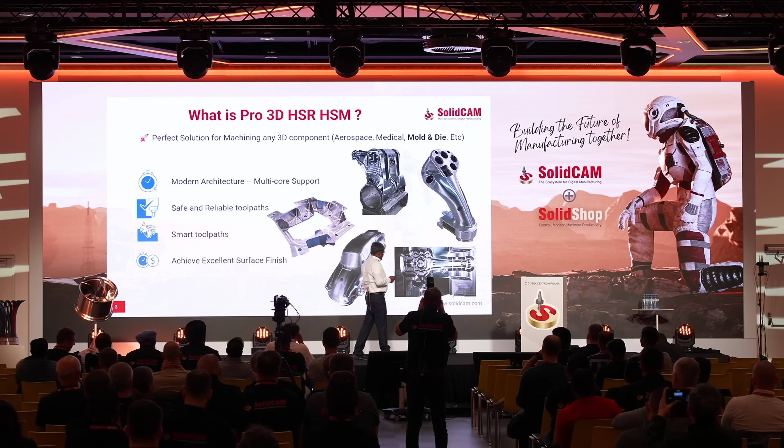And all the strategies in this technology generate collision-free toolpaths against machining surfaces and in-process workpiece to make sure it generates safe and reliable toolpaths. And we have smart links and optimized retracts. And then we have optimized point distribution and advanced arc fit to achieve excellent surface finish.

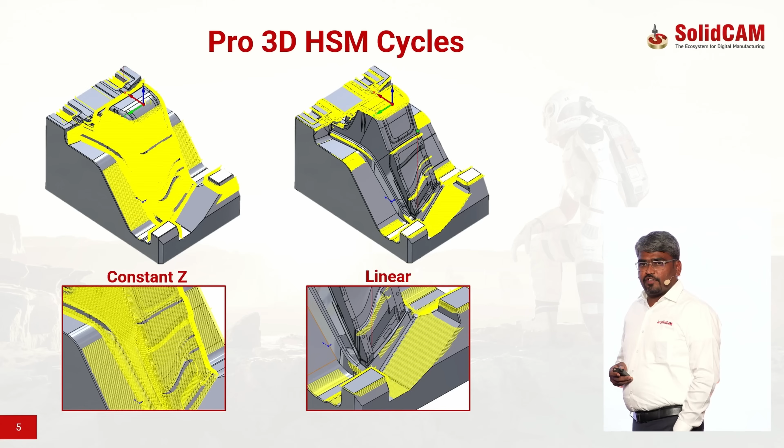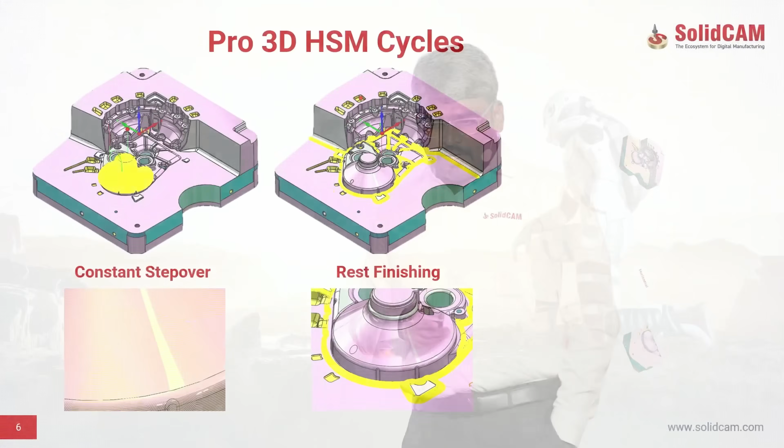Pro3D HSR offers several machining strategies: hatch, contour, and rest roughing. And then finishing offers various cycles. Constant Z for finishing steep areas, linear for finishing shallow areas, and combined for machining steep and shallow areas together. And then we have the excellent constant step over. You could use this cycle for machining steep and shallow areas. And then rest finishing to process the corners which were not finished by the previous finishing operations. And finally, we have horizontal milling, which is a dedicated operation to machine flat or planar surfaces.

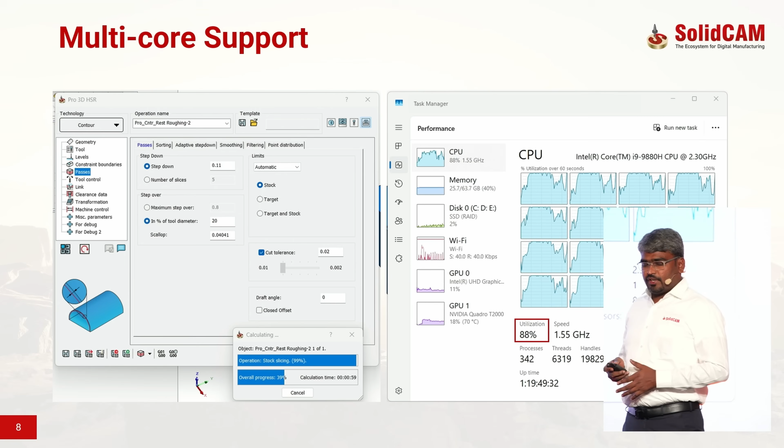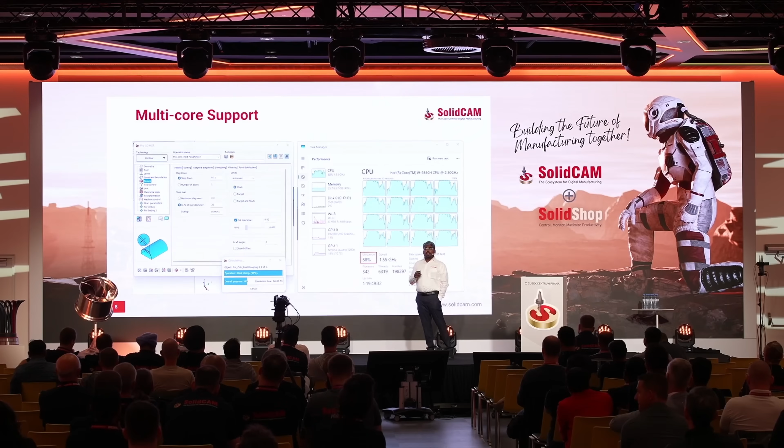Let's see some highlights. I always say these are the game-changing functionalities in 3-axis technology. This technology uses multi-core. It utilizes the full computing power of the latest workstations with up to 24 cores for ultra-fast toolpath calculations. And the recalculations are also faster thanks to its caching mechanism. Each stage of the toolpath calculation is cached and stored on the disk, so that subsequent toolpath modifications are calculated faster. For example, if you change the links, the links algorithm recalculates the toolpaths, and the calculation becomes much faster.

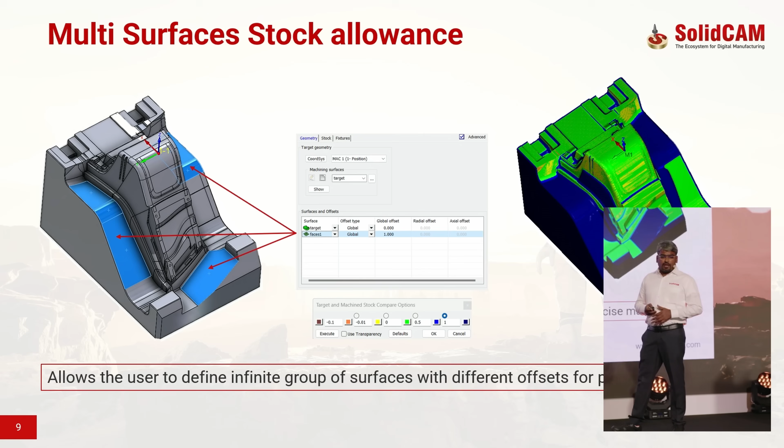Multi-surface stock allowances: you can define various surface groups with different stock allowances. This functionality is very useful when you're machining mold and die components, especially since the parting surfaces and the component areas usually require different surface offsets for applying different manufacturing processes.

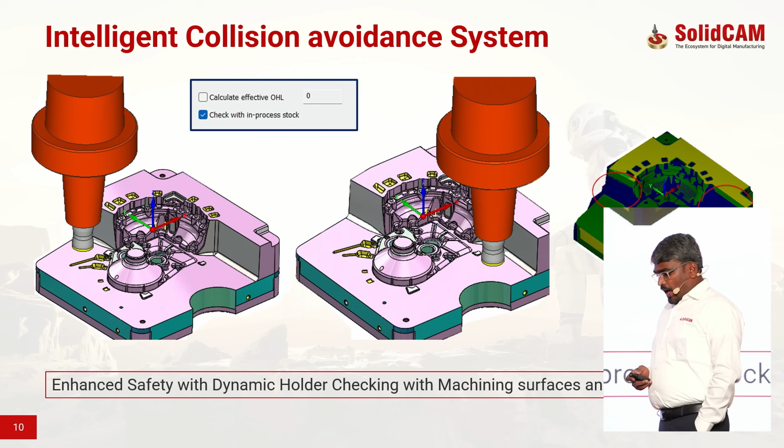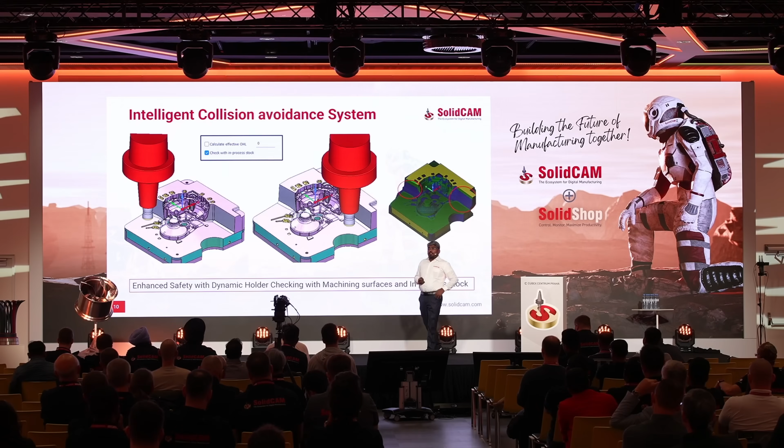And it is built in with an intelligent collision avoidance system. Until SolidCAM 2023, only the passes were generated collision-free against the in-process stock when you enable the check with in-process stock. From SolidCAM 2024, the whole toolpath, passes, leads, links, regardless of your link settings and lead settings, SolidCAM will automatically generate collision-free against in-process stock, because it knows the in-process stock at each Z level, and it can generate safe and reliable toolpaths.

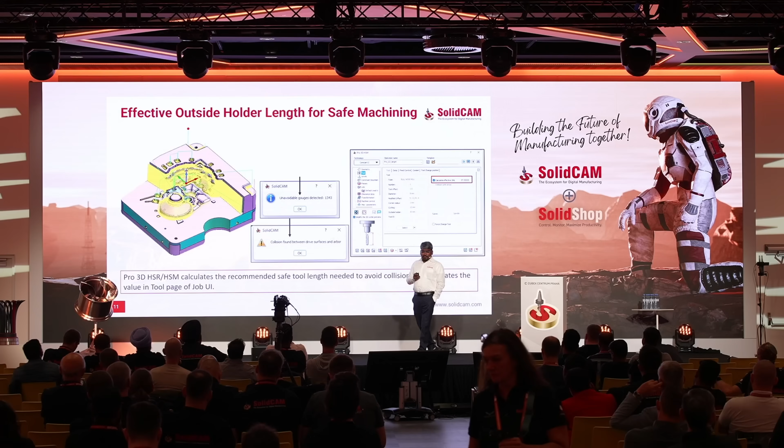And then it can suggest the effective outside holder length for machining the part. It helps us to use optimal tool length, neither too long nor too short. And the uniqueness of this feature is when the actual outside holder length is less than what SolidCAM suggested, it will show you the gouges detected by the software.

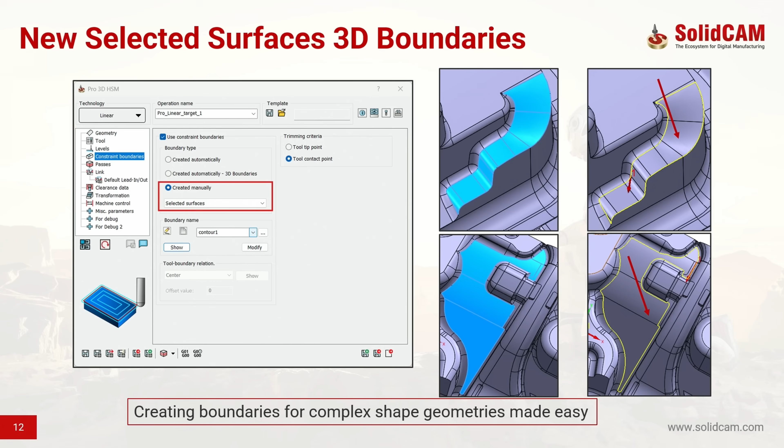And then we have new selected surfaces 3D boundaries. This is newly implemented inside Pro3D HSM. Since Pro3D HSM is a model-based toolpath generator, it needs precise boundaries for machining local surfaces. So thanks to our new selected surfaces boundaries, you can select any complex geometry. It could be convex, concave, or a combination of both. The new selected surface boundary will automatically generate a precise 3D boundary and send it for the toolpath calculation.

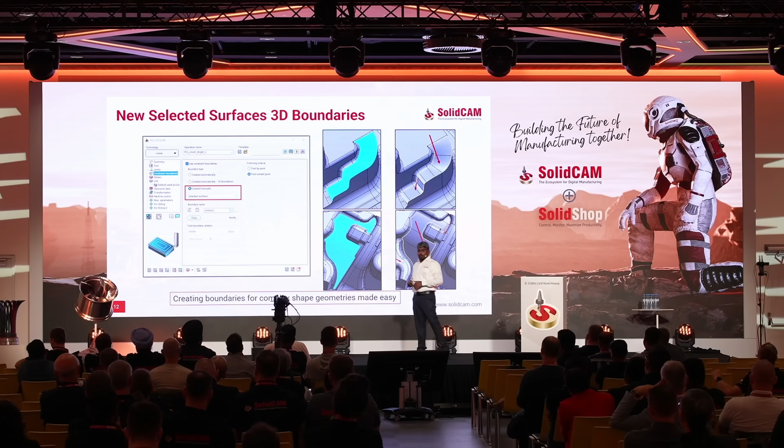Along with this, now we have 3D boundaries, and SolidCAM has to trim the passes precisely to that boundary. So in the tool page, you have trimming criteria. You can see on the left image, when the tool tip point is selected, you can see the spikes on the adjacent surfaces. Whereas on the right image, the tool contact point is enabled, and SolidCAM is able to precisely trim the toolpath exactly to the defined boundaries. This way, you can precisely machine the local surfaces.

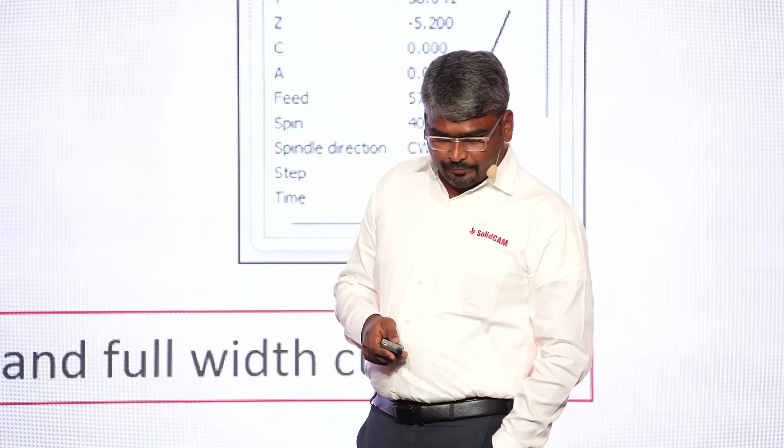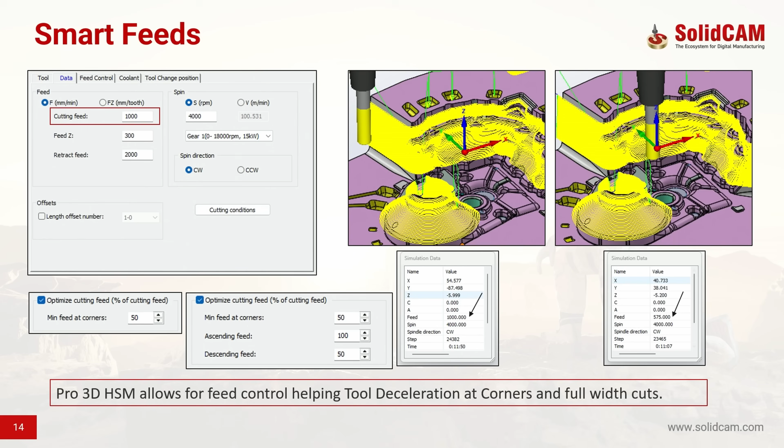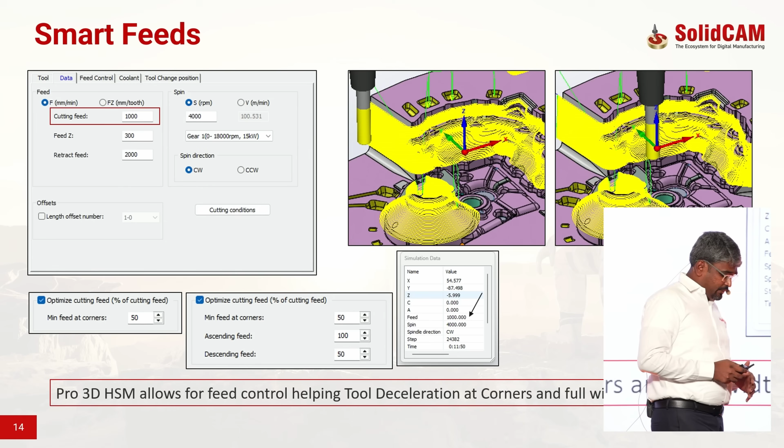Then we have smart feeds. I also call these intelligent feeds. Pro3D HSR HSM is designed to intelligently manage the feed rates while machining complex cores and cavities, especially on the corners. It smartly modulates the machine's velocity with gradual deceleration and smooth acceleration post-machining corner. And this sophisticated system significantly increases the feed rates in the less constrained areas, optimizing the whole machining time with less tool wear. This will help us to efficiently machine the part with accuracy in various cutting conditions.

And then it has a built-in efficient arc generator, and it is capable of creating arcs in any plane, and also capable of creating 3D arcs for spiral toolpaths. This will significantly improve the surface quality, and it also drastically reduces the NC file size.

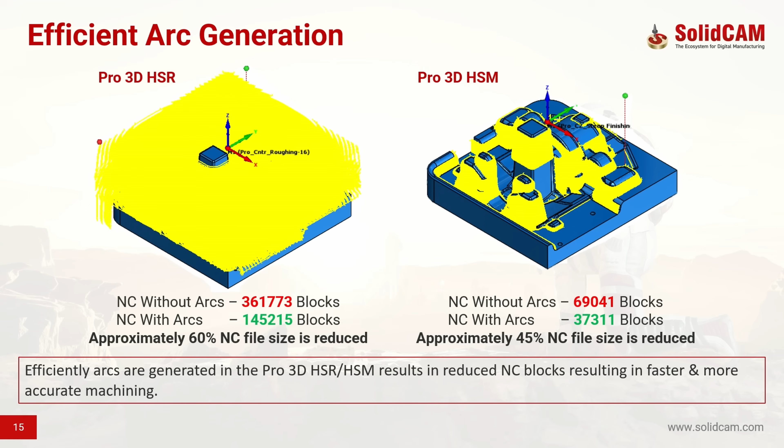You can see on the left image, the roughing toolpath without the arcs, the NC file contains 361,000 blocks, whereas with arcs, 145,000 blocks. Approximately 60% NC file size is reduced. Whereas in finishing, G-code without the arcs is approximately 69,000 blocks, whereas with arcs, it reduced to 37,000 blocks. Approximately 45% NC file size is reduced.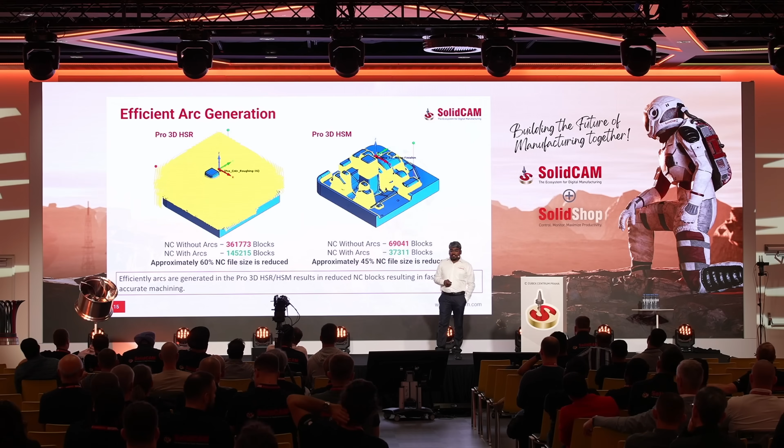And then we have high feed cutters. Usually, high feed cutters are defined as a bull mill with a programmable tool radius provided by the tool manufacturer. However, in this case, the toolpath that is created with the bull mill, and you see the resultant stock, and the stock that was generated after the real machining, they don't match.

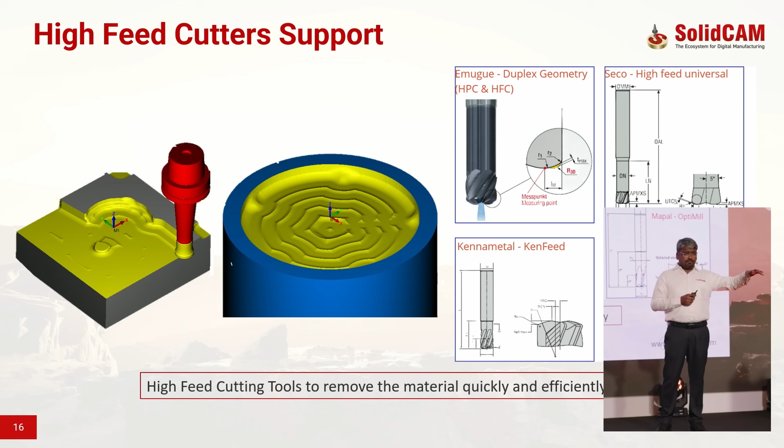So when you create a subsequent rest roughing operation, what happens? The CAM creates the toolpath which is based on the resultant stock provided by the bull mill. And when you run this toolpath on the machine, you have a problem. You will sometimes find more load on the tool because the stock is more on the real part. So how do we fix this issue?

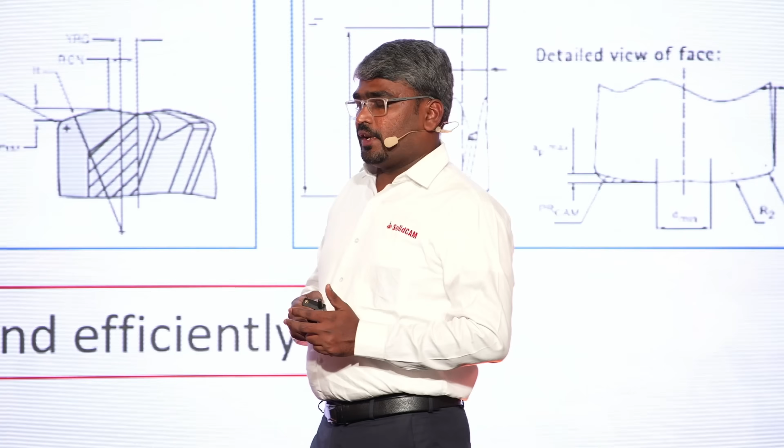From SolidCAM 2024, this system actually takes the exact shape of your high-feed cutters. It could be round inserts, it could be square shoulder inserts, it could be triangle inserts, convex tip, any shape. It can adapt the exact shape for mathematical toolpath calculation. Hence, it can generate safe and reliable toolpaths.

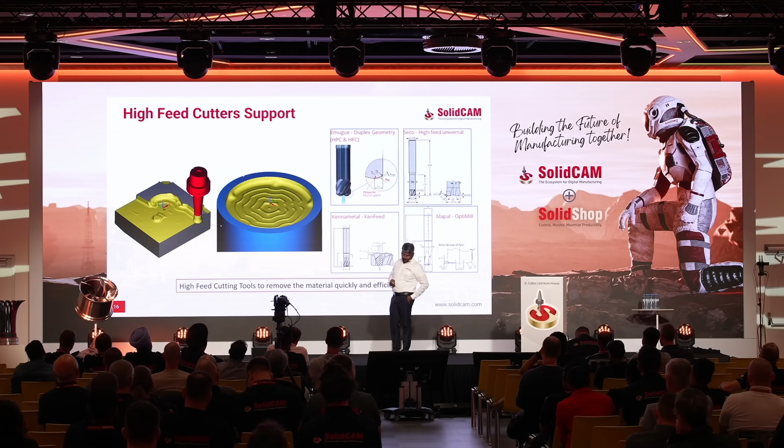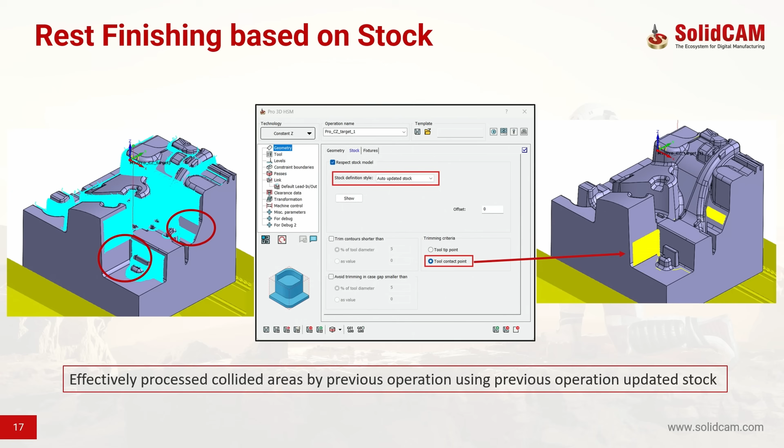And rest finishing based on the stock. You can effectively process the rest areas which were not processed by the previous operation. And like we had the trim to boundaries in the constraint boundaries, when you're working with the previous operation stock, you can also tell the system to exactly trim the passes to the provided stock. And this way, you can efficiently process the rest areas.

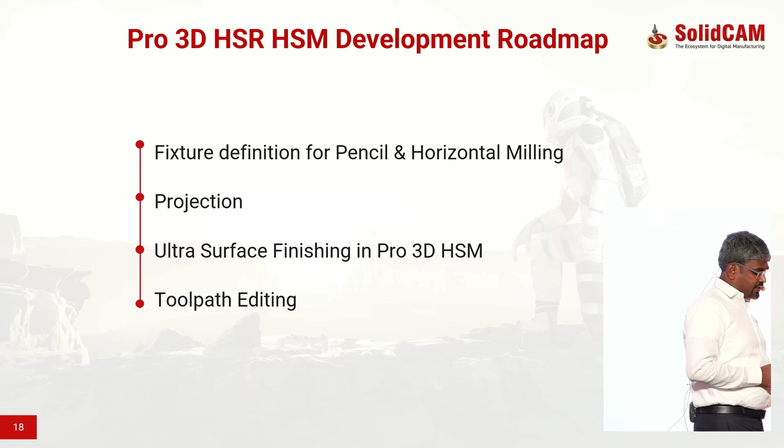And then ultra-surface finishing in Pro3D HSM. Until now, the toolpaths are being calculated on the STL mesh. So we are working on a different approach where SolidCAM can actually take the NURBS surface data and use it for the toolpath calculation in order to achieve ultra-surface finishing. So initially, this will be available for the linear machining, and then it will be extended to the other cycles.

So toolpath editing, it's not a new subject for us. It's been there for a long time. Today, I want to assure you that this toolpath editing will be soon available in SolidCAM 2026. So apart from this, we have made some developments. Their prototype solutions are already there.

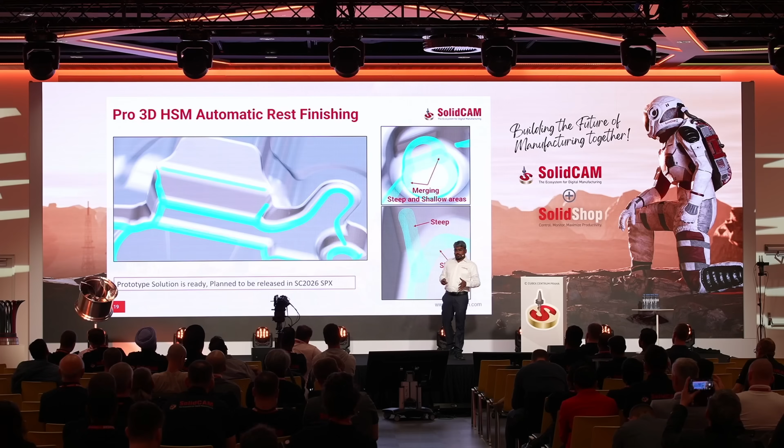In finishing, we have corner finishing, automatic rest finishing. So this is a new generation corner finishing. You can see on the right image, the stitch between the steep and shallow areas, it's very nice. And you can create the rest finishing toolpath using previous operation tool and also the stock. So this we are going to test very soon on the machine, and it is planned to be released in SolidCAM 2026.

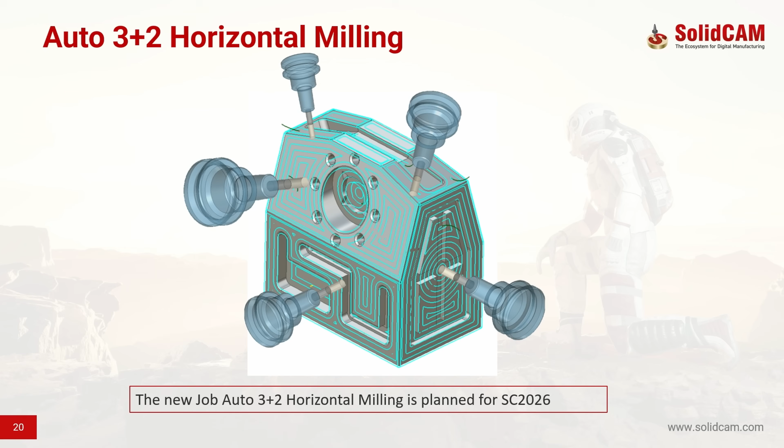And then we have the new job, Auto 3+2 horizontal milling. Let's imagine you have 10 flat surfaces from different directions, right? So with the current SolidCAM approach, you have to create 10 operations with the different coordinate systems, right? So how do we simplify this workflow?

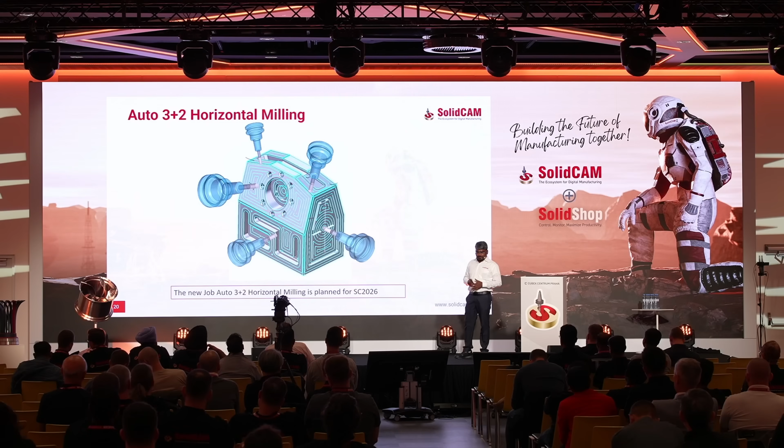With this new Auto 3+2 horizontal milling, SolidCAM automatically detects the flat surfaces from each direction and creates the toolpaths. And instead of 10 operations, you will end up creating only one operation for all the 10 surfaces. So the detection mode could be automatic, semi-automatic, and manual, the same like we had in the Auto 3+2 roughing.

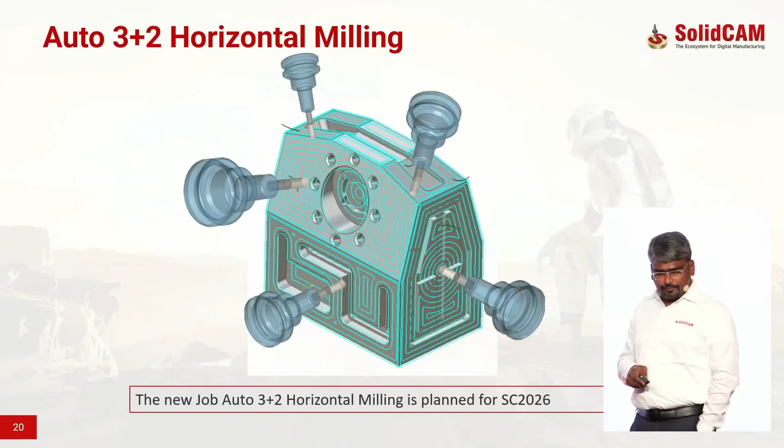And then we have rest finishing by outside holder length. Until now, we can do rest finishing based on the previous operation stock, based on the previous operation tool. Now, we are going to have the third rest finishing option, with which you can create a rest finishing operation using the outside holder length of the previous operation.

And this way, you can efficiently machine those areas we usually call the collided areas. So you can process these collided areas easily just by giving the information of what is your previous operation outside holder length.

And then we have exciting information over here. We have compared Pro3D HSR HSM against one of the leading CAM software for mold and die machining. And there are some things which are really impressive in the Pro3D HSR HSM. So as you all probably know, the calculation time, of course, we are much faster than any CAM software. In this case, we are 3 times faster. Sometimes it goes up to 5 times faster.

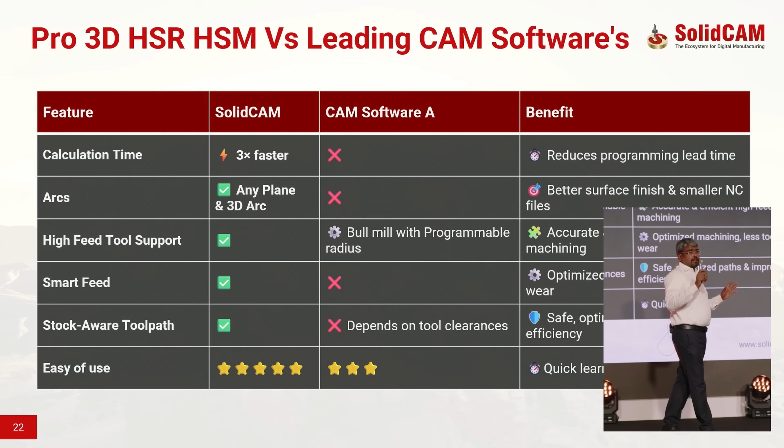And then SolidCAM is capable of creating the arcs in any plane and 3D arcs as well for spiral toolpaths, whereas the competitor still generates the points in the toolpath. And then we have high feed tool support. We don't define the bull mill with the corner radius. We define exact tool shape and use it for accurate and efficient high feed machining, whereas competitors still define these high feed cutters as a bull mill with a programmable radius.

And then we have smart feeds. They have constant feeds. And then Pro3D HSR HSM has stock-aware toolpath. And this is very important. At each stage of the toolpath, SolidCAM analyzes the in-process stock at each Z level in order to generate safe toolpaths. It could be passes, it could be links, it could be leads. Whereas in the competitor, they still depend on the tool clearances.

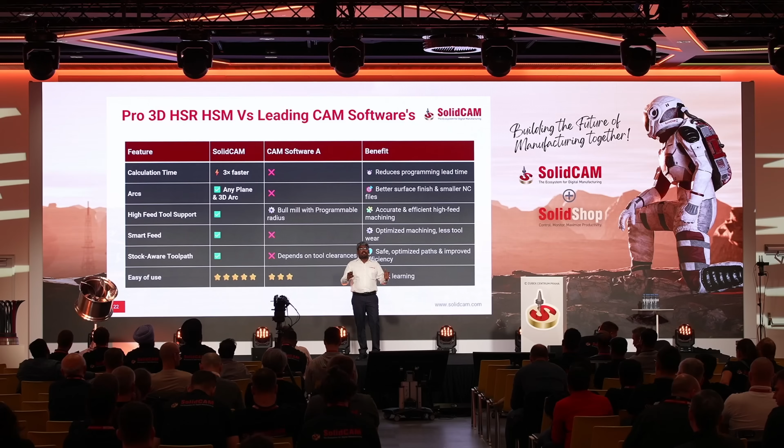So ease of use, of course, we have a nice structure, user interface, and it's easy to learn. And then most of the things are automatically created inside Pro3D HSR HSM. You don't have to manually think how to approach from the outside, where to ramp, where not to ramp. All these decisions are made automatically by this technology. That's where the Pro3D HSR HSM makes the programmer's job easier. And this rating was actually given by some of the programmers who have 15 years of experience in the competitor software, and they are currently using SolidCAM.

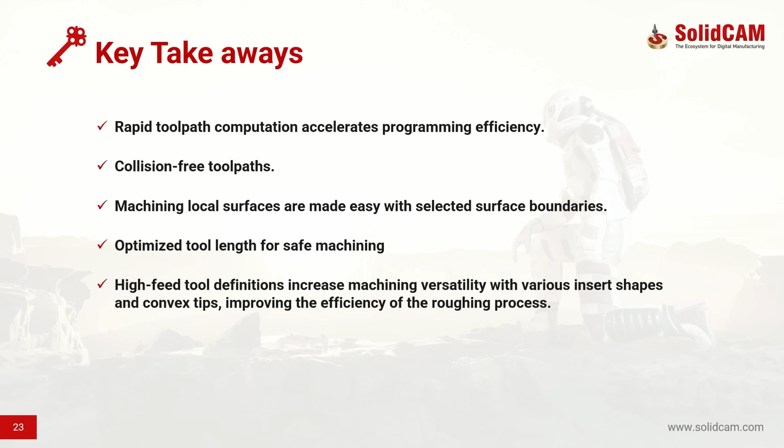So to summarize, we have faster toolpath calculations, we have safe toolpaths, and we have new selected surface boundaries to efficiently machine the local surfaces. And then we have optimized tool length for safe machining. And we have high feed tool definitions. So we have seen all the functionalities. Let's see it in action.

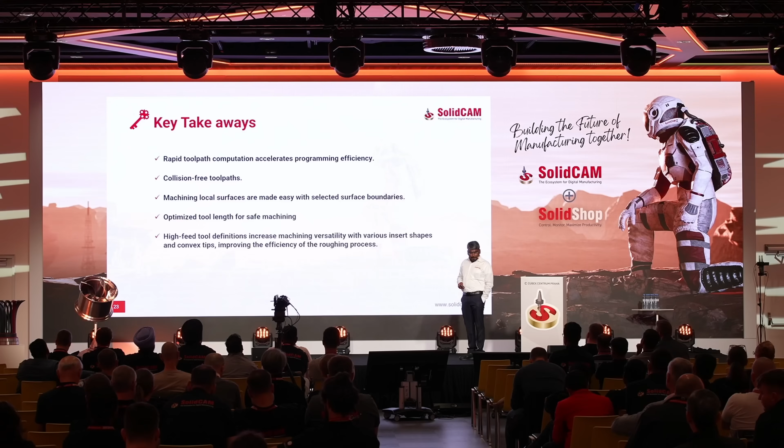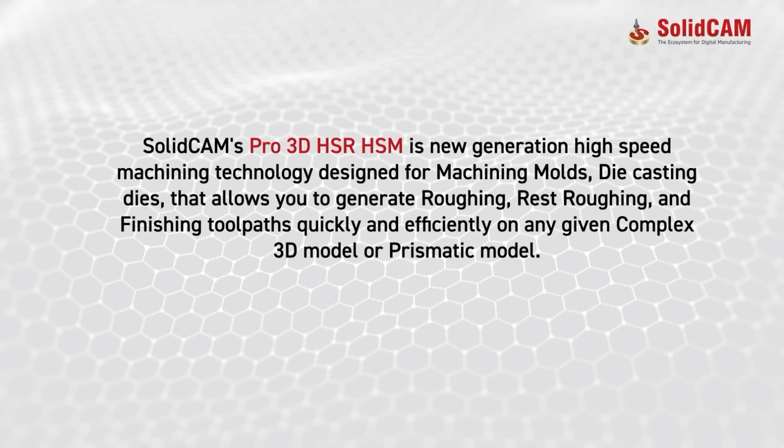SolidCAM's Pro3D HSR HSM is new generation high-speed machining technology designed for machining molds, die casting dies that allows you to generate roughing, rest roughing, and finishing toolpaths quickly and efficiently on any given complex 3D model or prismatic model.

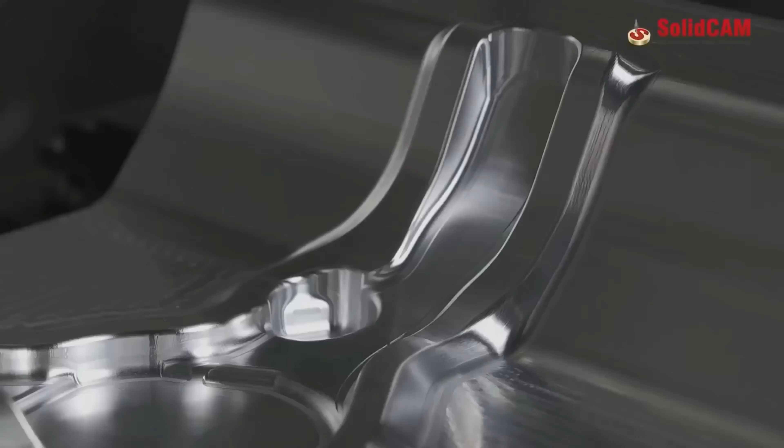So now let's see a sneak peek of Pro 5-axis milling. What is Pro 5-axis milling? This is Pro3D HSM combined with the Sim 5-axis milling tool-axis control. So this technology is designed to machine mold and die parts in 5-axis mode. So we have this part, a complicated die here. Just imagine finishing this component using 5-axis surface-based operations.

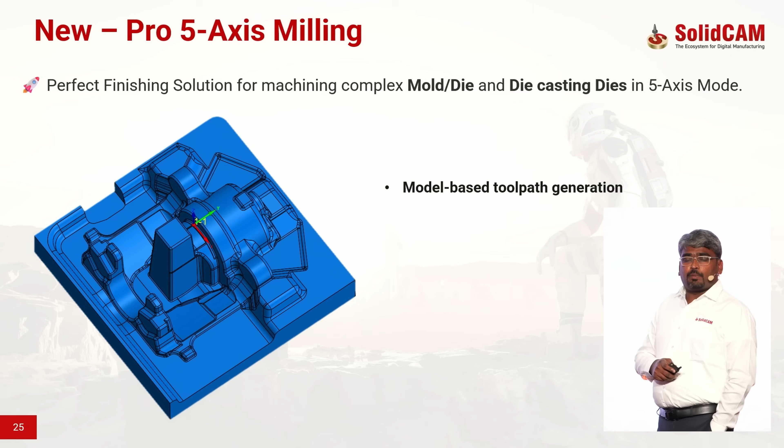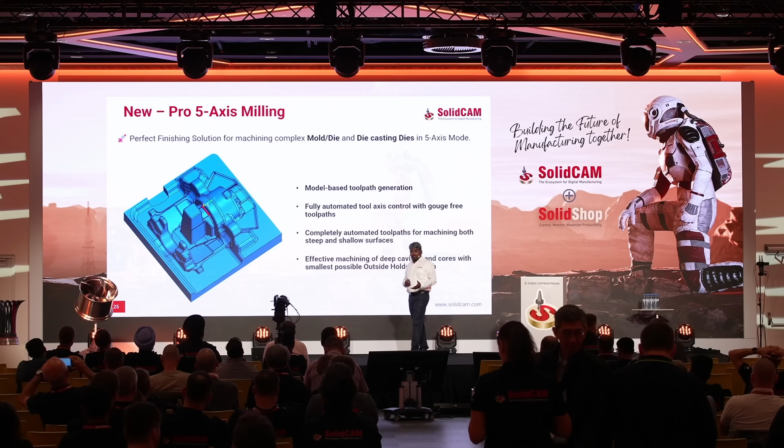It is a model-based toolpath generator. And then we have fully automated tool-axis control with gouge-free toolpaths. No gouge check. All the gouge checking is taken care of by SolidCAM. The toolpaths are completely automated for machining deep, steep and shallow areas, basically. And it can effectively machine the deep cavities and cores with the smallest possible outside holder length.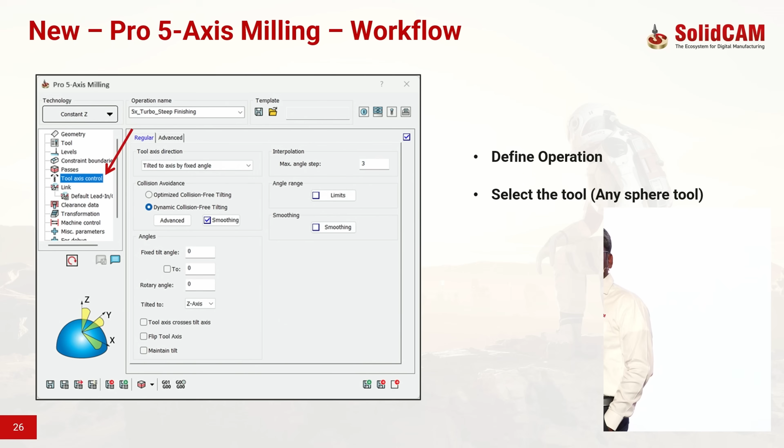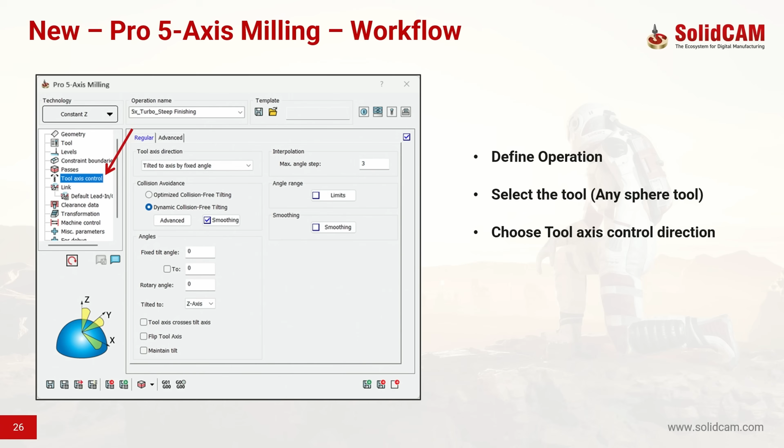And then, in the tool axis direction, you have a few options. You can tilt through points, you can tilt through lines, or you can tell the system, I want to tilt using a fixed angle direction. So it is always the machining direction. And then choose the collision avoidance. We have two options, optimized collision-free tilting and dynamic collision-free tilting.

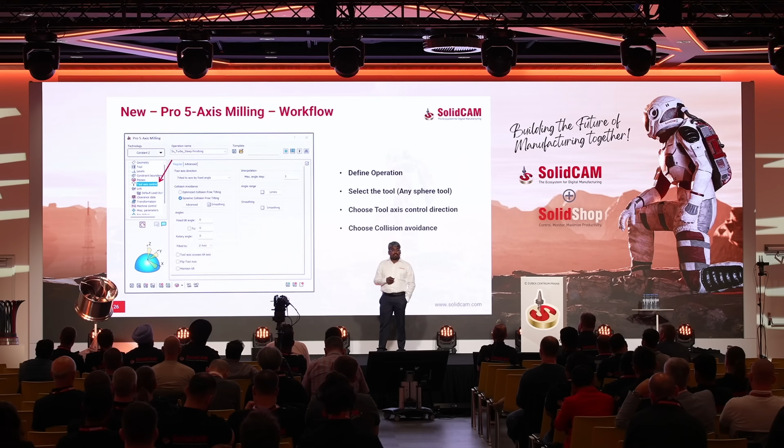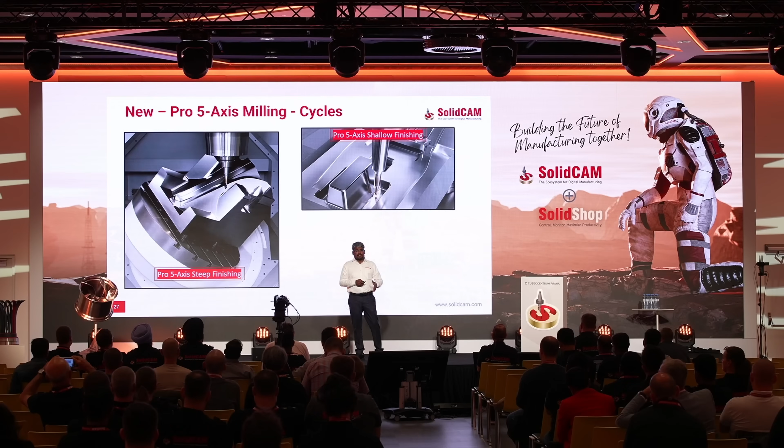So it supports all the cycles that are available in the Pro3D HSM. Here I mentioned the three major cycles. 5-axis steep finishing, which is constant Z milling. Then 5-axis shallow finishing, which is linear milling. And then we have corner finishing. Let's see a small video on this.